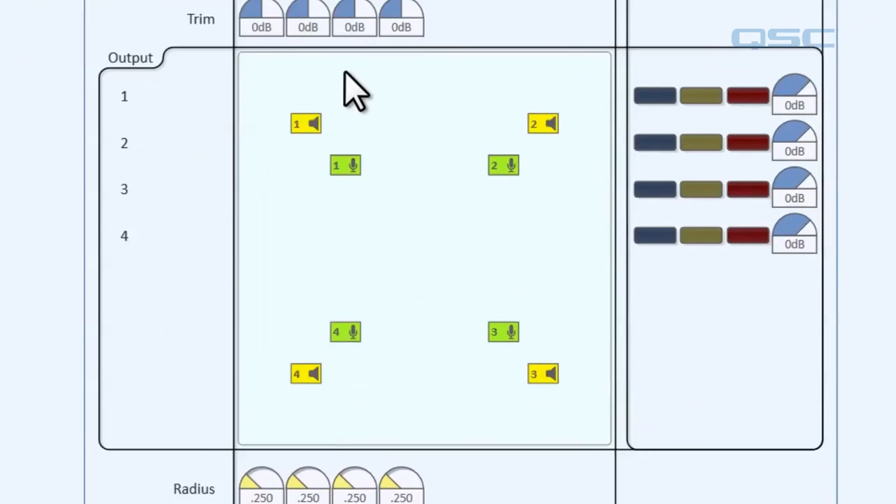Let's say we wanted to make some changes to the mixer, like so. Let's move this over here and this over here. But we wanted to be able to swap between this setup and another setup just by clicking a single button. Well, we can do that by using snapshots.

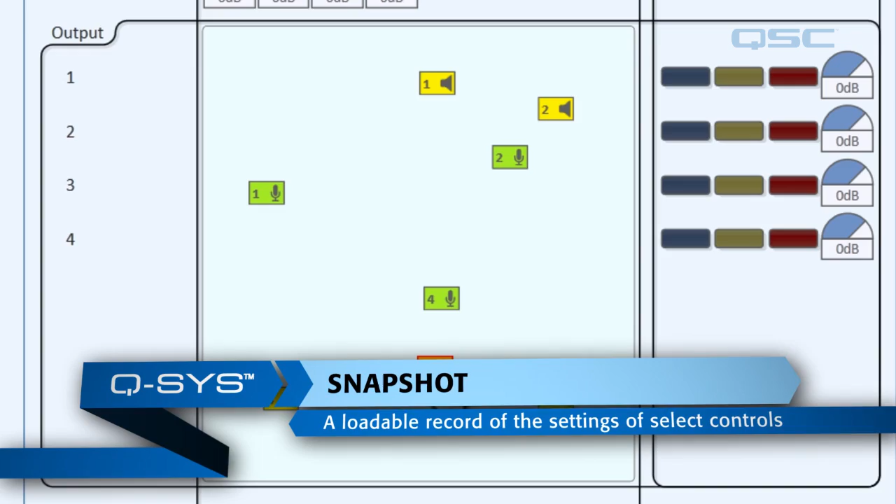Let's exit emulation mode by pressing F7 and go over to the left side pane and we'll look at the snapshot panel. Now by default, you'll see that we have the global snapshot bank available. Now what this means is that any snapshot that we make with this bank will save the value of every control in our entire design. It's global. All right, let's grab our global bank component and drag it into our schematic. And you'll notice once I do that, the component disappears from the left side pane.

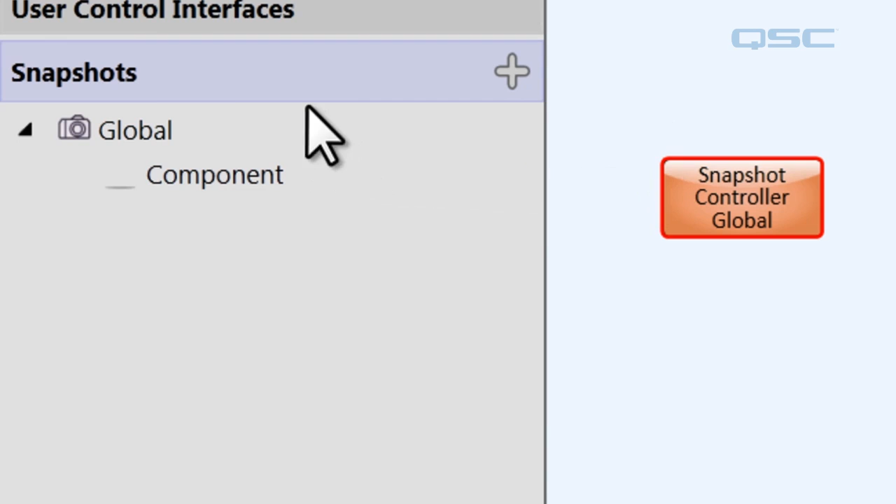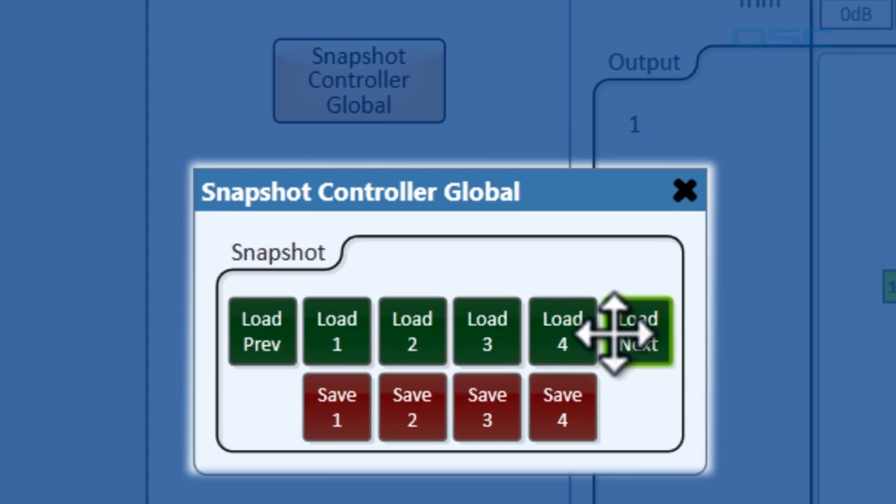Now let's double click this component. Here is our control panel and you'll see that we've got load and save buttons for our 4 snapshots. And we also have this load previous and load next button if you want to cycle through any snapshots that you have. Now if you come over here to our properties pane, you'll notice that you really only have one option, and that's snapshot count. You can have as many as 24 snapshots in a single bank. But for our intents and purposes, we're only going to use 4 of them.

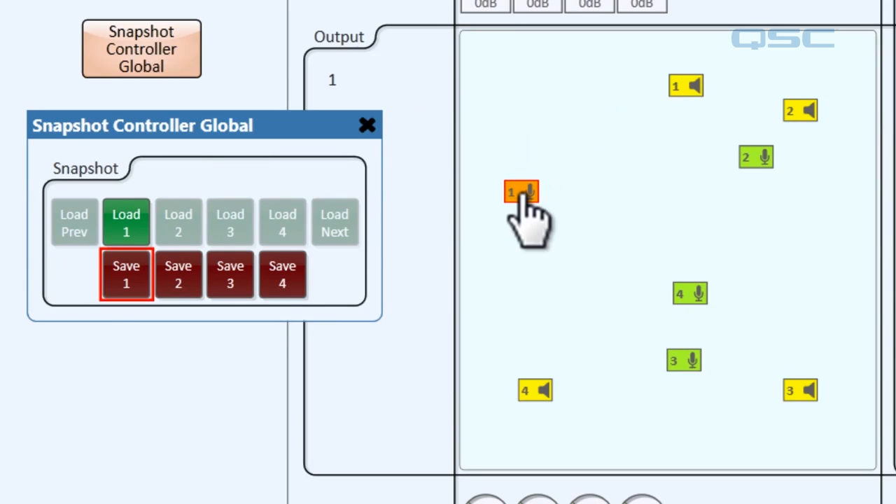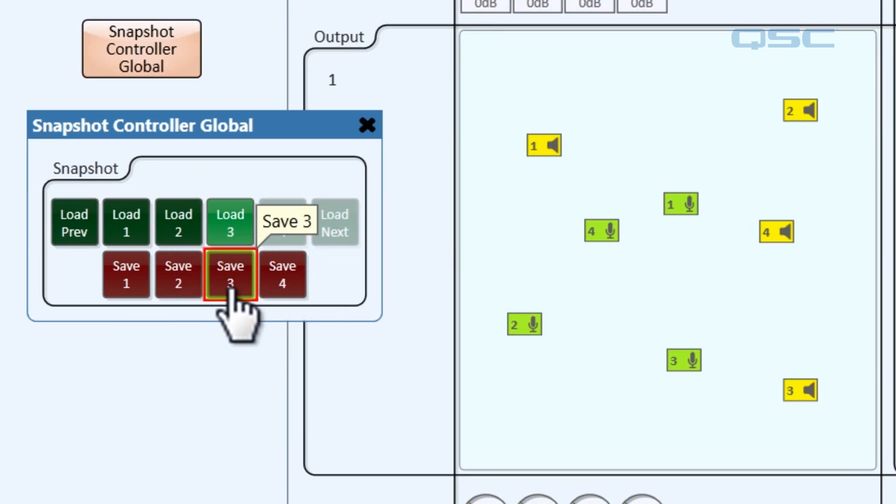Now let's go back into emulation mode and we'll try this thing out. Let's save this setup as snapshot 1. Now as you can see, when I do that, the load button glows a bit now. So that tells you that our snapshot is saved. Now let's move around a couple of these components and save that. And let's save one more and we'll hit the save button. Now, if we want to toggle through them, all we have to do is click the Load Snapshot 1 or Load Snapshot 2, or we can use the Load Previous and Load Next to just toggle between our choices.

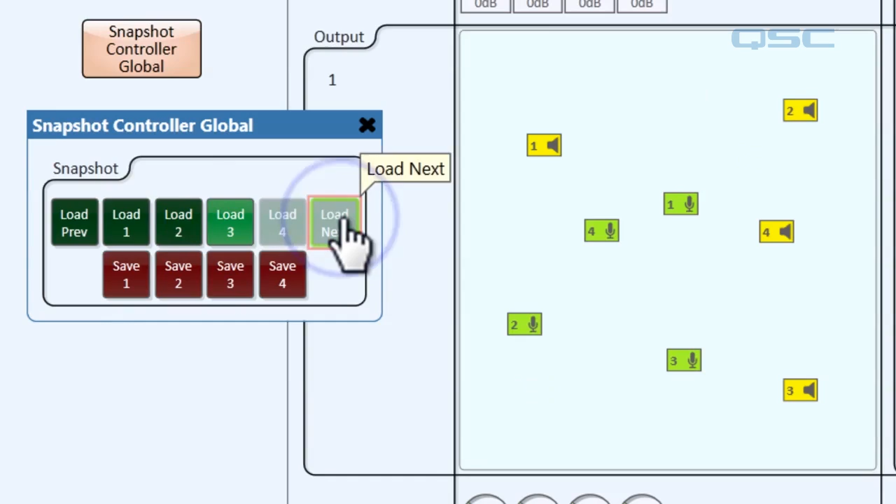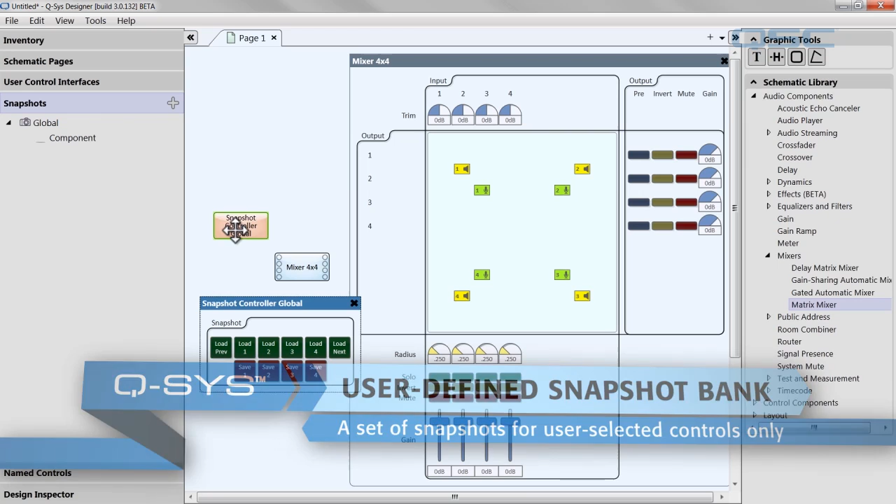It's really that simple. But in a realistic setting, you probably won't need to change every single control in your system. You're going to want a snapshot that only controls certain parts of your design. So let's create a user-defined snapshot bank. We'll start by exiting emulation mode, and let's remove the global snapshot component, and then come over here and press the plus icon in our snapshot panel. And we're going to choose Create New Snapshot Bank. And now we have Snapshot Bank 1 listed right over here.

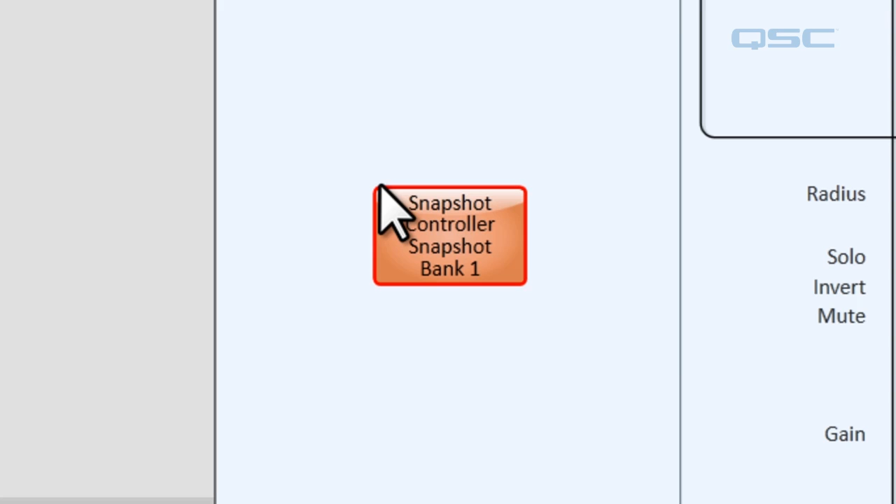Let's drag this component into this schematic. Now we need to tell this snapshot what we want it to control. There's 2 methods to do this. One method is to just grab the component, like our mixer, and drag it over to the snapshot bank. And when you hover over it, you should get a hover over that says Add Selected Controls and Components to Bank. When we release the button, you can see that the mixer and all of its controls are now recordable by our bank. Now if you want to remove this from the bank, all you have to do is click on it and press the delete key.

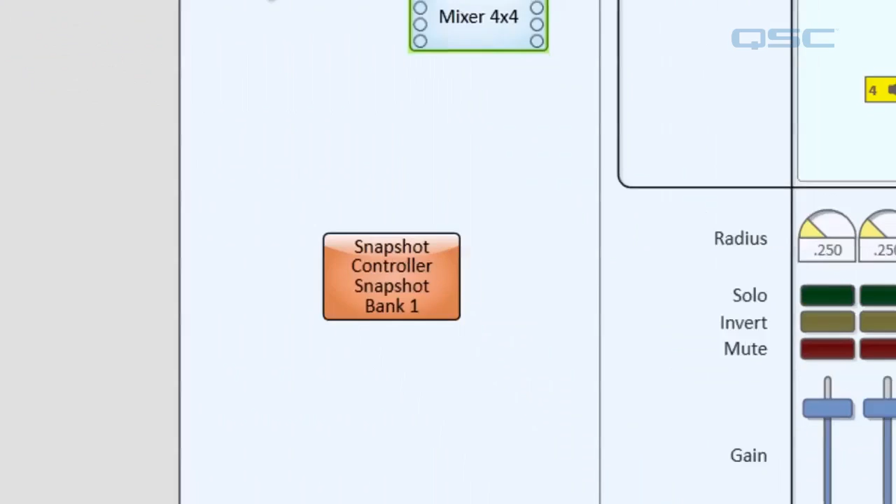Now you can also drag specific controls instead of the whole component. Let's just drag our gain fader into our snapshot bank. Like so, and voila, it shows up down here. Now the second method is to start by selecting what you want to control. For instance, let's select the entire mixer, and then come over to the snapshot plus icon, and then choose Create New Snapshot from Selection. And now you have a new snapshot bank with that component loaded into it.

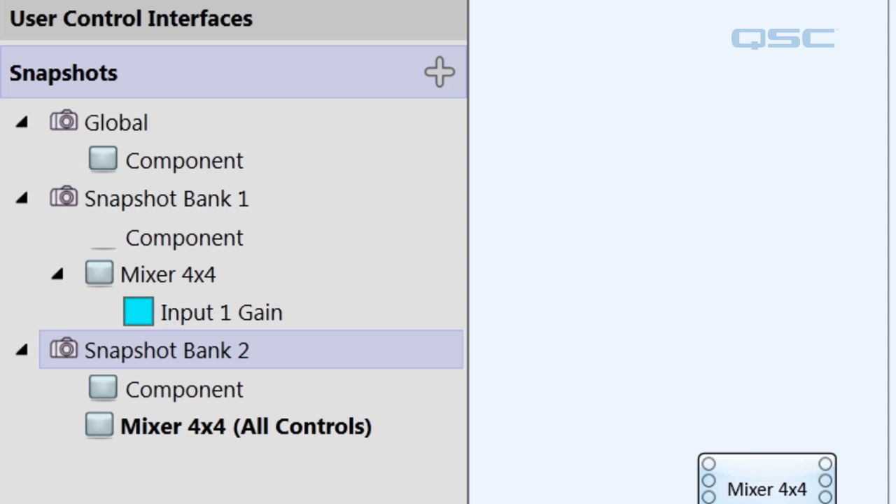Let's rename our snapshot banks, shall we? Let's call this one Gain Only. And we'll call this one Entire Mixer. Let's drag that one into our schematic. You can see here in the Properties panel that we have a new option, and it's called the Mode Select. Now you're familiar with normal mode because that's the default. Scene mode will automatically save the snapshot you're in when you load a new one. And Write Protect will give you a button that will lock out your save buttons. Now for the sake of this demonstration, let's set both of our snapshot counts to 4.

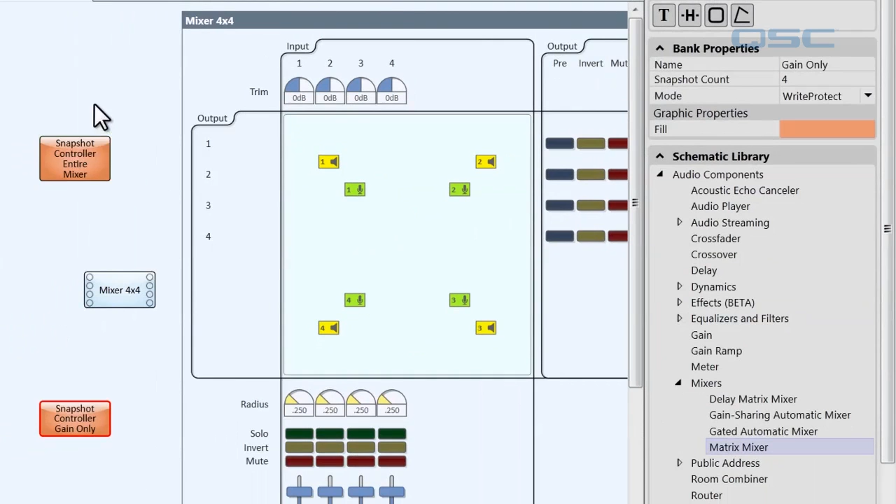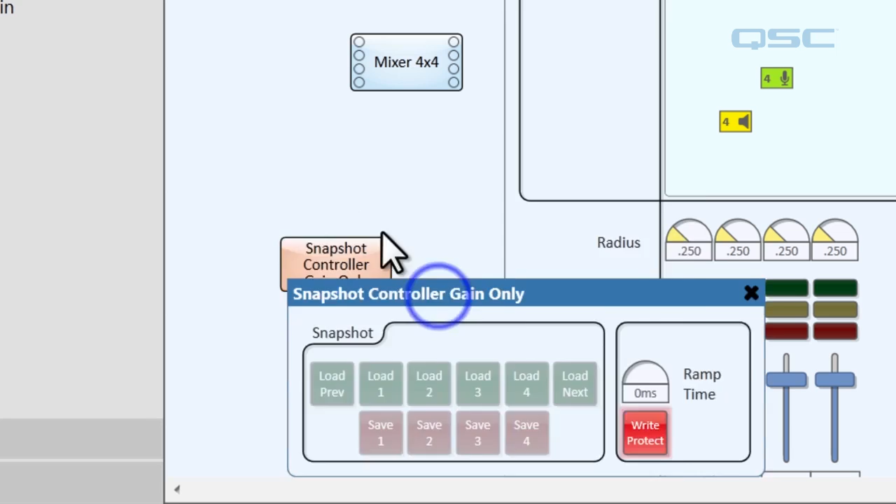Let's go ahead and emulate. Let's save a couple presets for our gain faders. First, let's double click here to open up the control panel. Unclick our Write Protect. And we'll save this setting, and then we'll move it. We'll save another one, and we'll move it one more time. Now, as you can see, I can use these load buttons to toggle in between these presets.

Now, if we make other adjustments to our mixer, let's say if we move a few of these gain faders, and if we were to load another snapshot, you can see that our first gain fader is moving, but the other ones that we've changed are not. So it's only controlling what we've selected it to control.

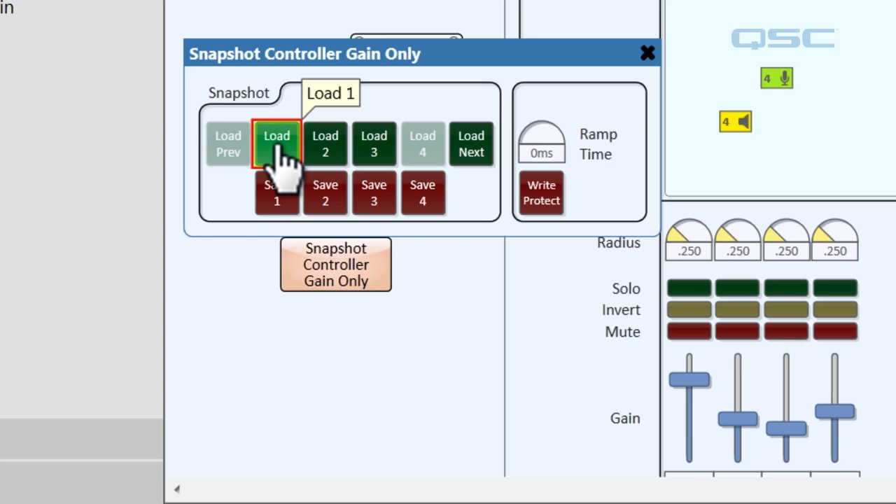Now let's make a few snapshots for the entire mixer. Let's move this down here and open this up. Let's unclick the Write Protect. Let's save this setting right here, and we'll move a couple of these around. All right, let's fast forward a bit while I save a couple snapshots in our design.

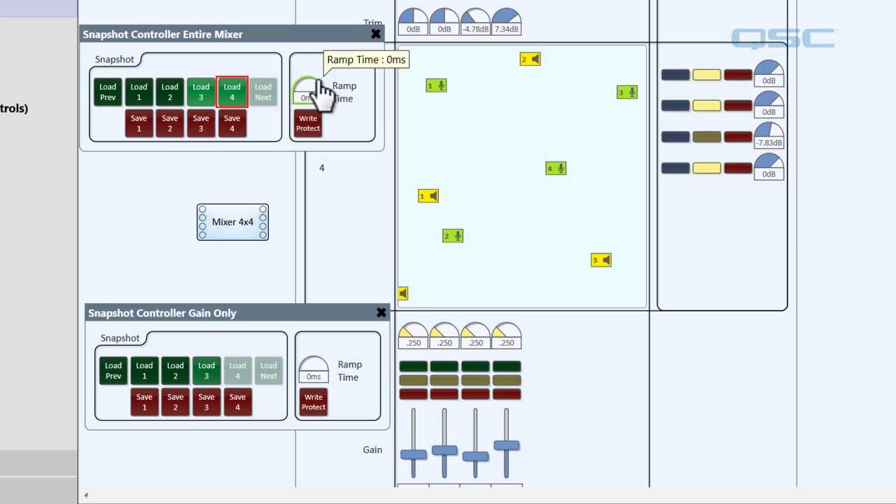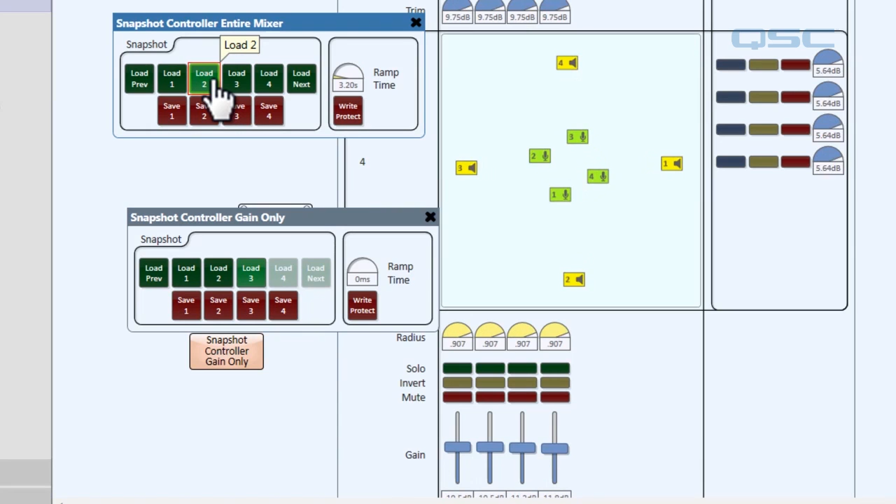One final feature of the user-defined snapshot bank is the ramp knob. The ramp will adjust the amount of time it takes to move the controls from one snapshot to another. Let's set this to about 3 seconds. Okay, we can toggle between these snapshots and adjust every control, including our gain fader. Now we can still use our gain snapshot to change our gain fader, but the entire mixer snapshot will change these as well.

The great thing about the snapshots is that you can automate them by using the Q-SYS admin tool. If you're interested to see how this works, check out our admin tutorial on the website. And that's the snapshot feature. You can use it as much as you like to create some very simple presets for some very complicated designs.